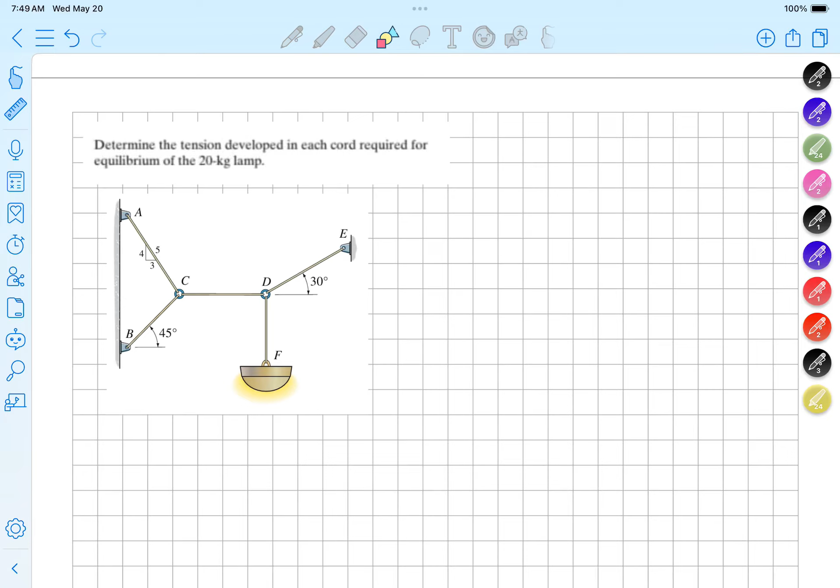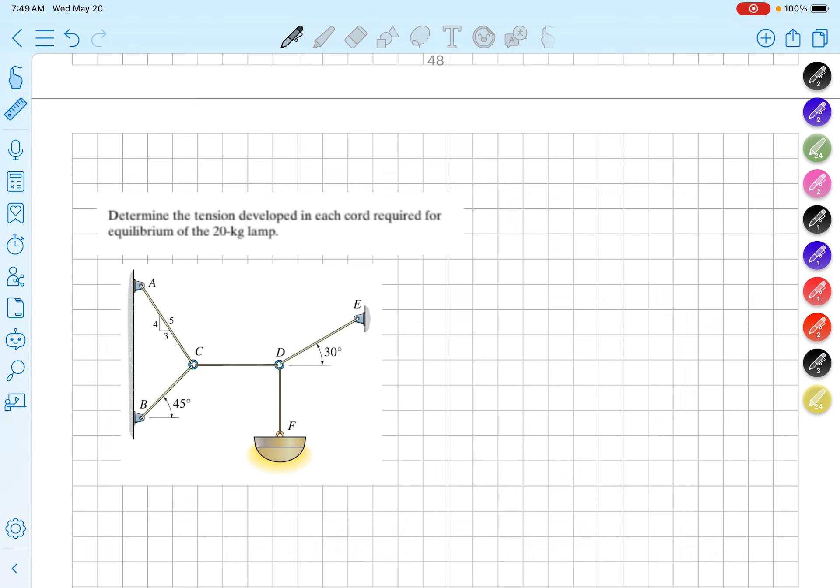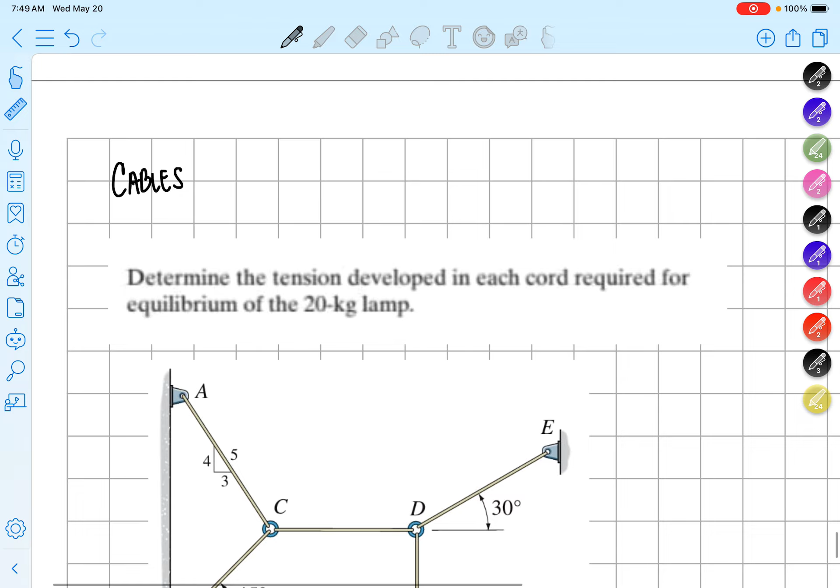So these are just additional example problems, one lang naman, under the cables. Ito yung na-discuss natin, meron ako sinend sa inyo yung video kanina, with parabolic cables, the symmetric and non-symmetric parabolic cables. Ngayon naman guys, yung typical approach lang natin, this is just also the problems related to cables, yung approach na to guys is para lang siyang basta simple equilibrium lang, paano natin siya i-analyze when it comes to solving the problems.

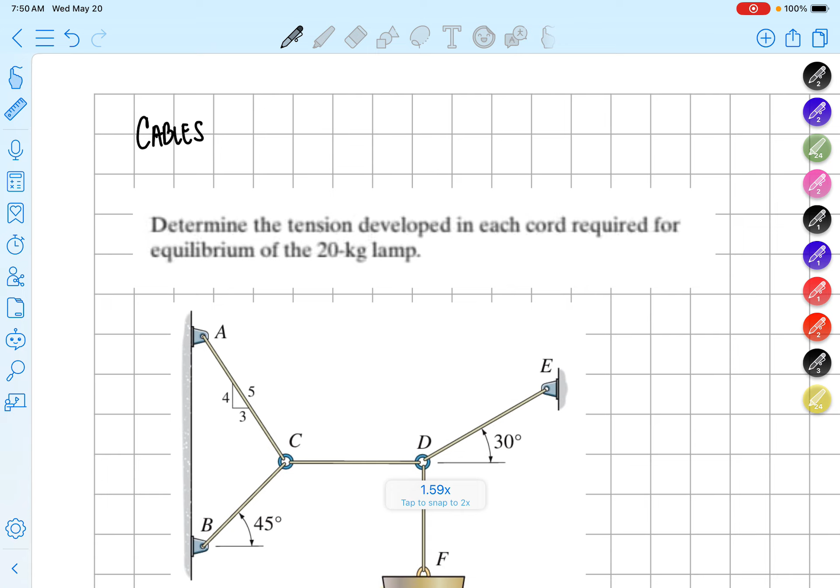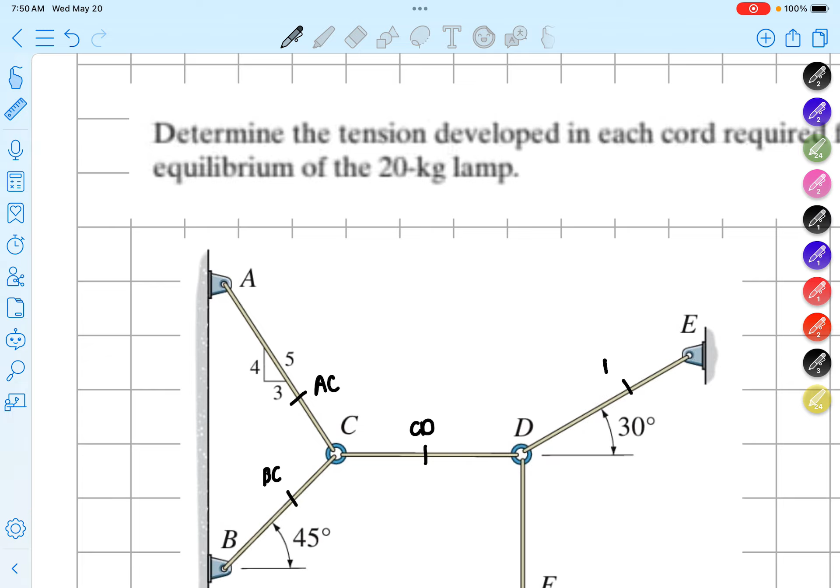Okay, so now, ang tinatanong dyan is determine the tension developed in each cord required for the equilibrium of the 20 kilogram lamp. Okay, lagay natin, this is AC, this is cord BC, this is cord CD, this is cord DE, and of course this is cord DF. Okay, nagkakaintindihan?

So guys, kung papansin niyo, pagka tinake natin itong F na to, by the way, this is 20 kilogram. So in order for us to identify ilang force yung 20 kilogram na weight, i-multiply natin yan ng 9.81 meter per second square na gravitational acceleration. So 20 times 9.81 is simply equal to 196.2. What's the unit? Of course, Newton.

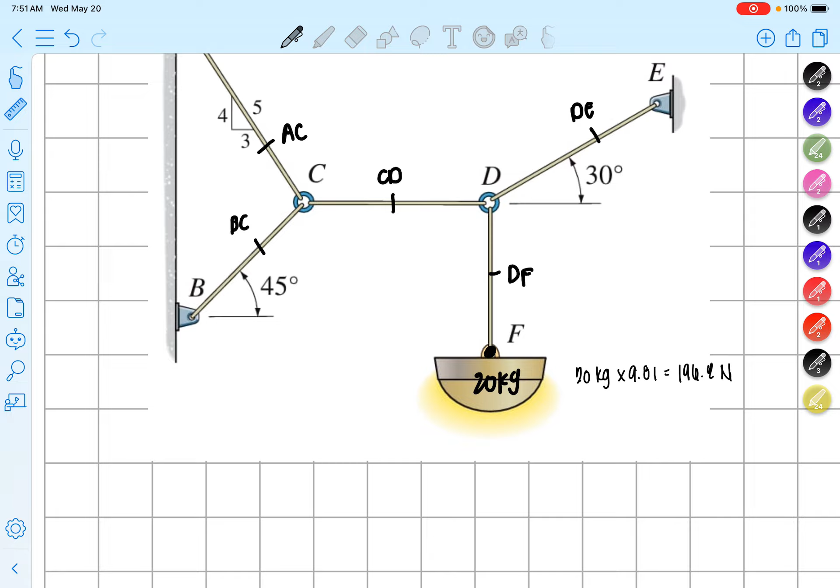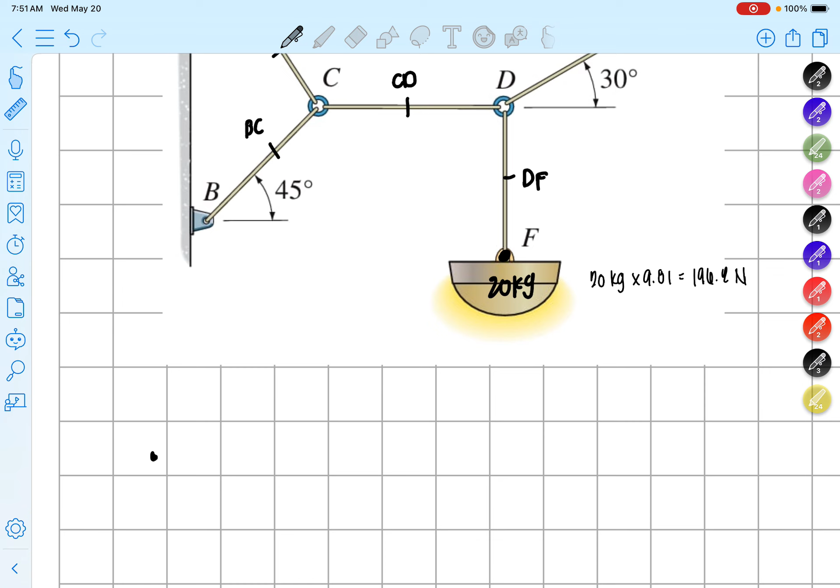Okay, so ngayon titingnan natin. If we're going to isolate the joint F, kasi doon tayo magsisimula, di ba? Parang kumbaga sa method of joints, kung saan tayo solvable. Kung mapansinin nyo sa joint F, or sa point F, lagay natin, baka kasi ma-confuse kayo. Kung lalagyan natin, di ba this is 196.2? Tama, 20 times 9.81 is 196.2 Newton. And then yung force, of course, pag cable, we have tension, di ba? So pataas yung ating DF, okay, for tension.

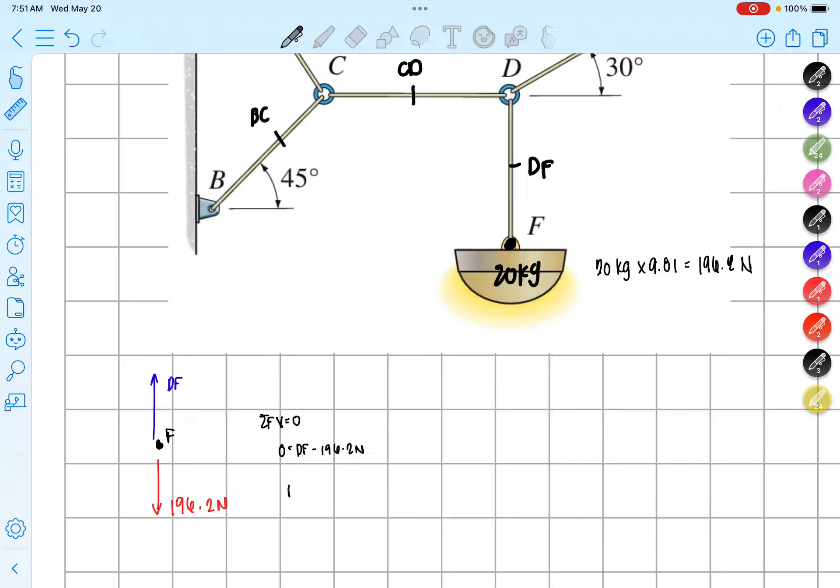So, in this case guys, we have the summation forces vertical lang is equal to 0. 0 is equal to DF minus 196.2 Newton. So in this case guys, we have DF is equal to 196.2 Newton lang din. So, technically guys, ito na yung force natin sa DF. Yan ay patatawirin natin ngayon.

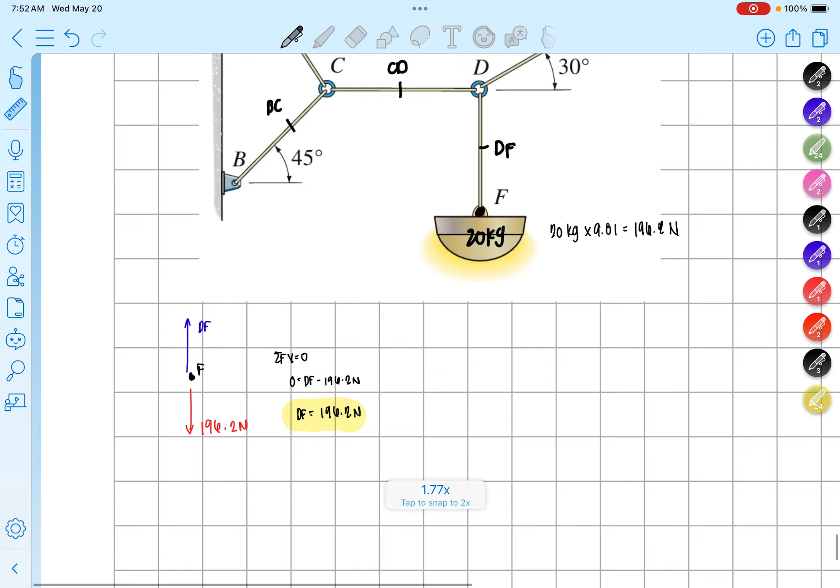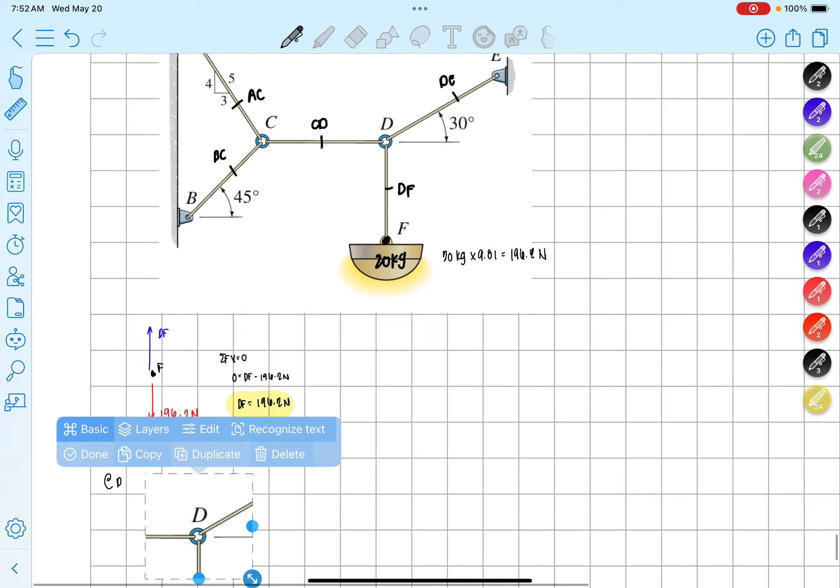Okay, so let's say at point D, i-isolate natin yung point D siguro. Pwede kaya ito? Teka lang. Okay, tingnan natin kung pwede. Yun, pwede pala yun. So ibig sabihin, in-isolate natin yung point D. Diba guys, that this is your DF, this is your DE, tama, and this is your CD. So in this case guys, lahat yan cable, alam natin lahat yan is tension, diba? Wala ka namang compression na cable.

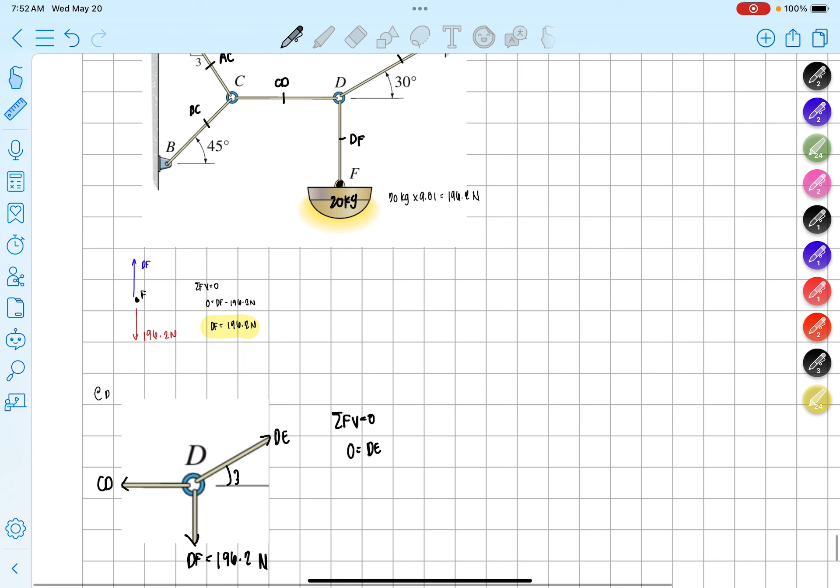Okay, so DF natin is equal, of course, to 196.2 Newton. Paano masasolve yan? Para masolve natin yung cable CD and DE, babalik lang tayo sa summation forces vertical is equal to 0. 0 is equal to DE. Ilan yung angle natin? So this is nakalagay, 30 degrees.

Tama, DE we have sine of 30 minus 196.2. Yung bang CD may vertical component ba? Wala, kasi along the horizontal siya. So DE is simply equal to 0, DE sine of 30 minus 196.2. This is equal to, for DE, we have 392.4 Newton for our DE.

Okay, next, for summation forces horizontal equal to 0. So we have 0 is equal to negative CD, tama, plus DE cosine of 30. Okay, and then yung DE natin guys is we have 392.4. So technically, we have negative CD plus 392.4 cosine of 30. So this is equal to 339.83. So ang CD natin is equal to 339.83 Newton. So this is our answer for CD.

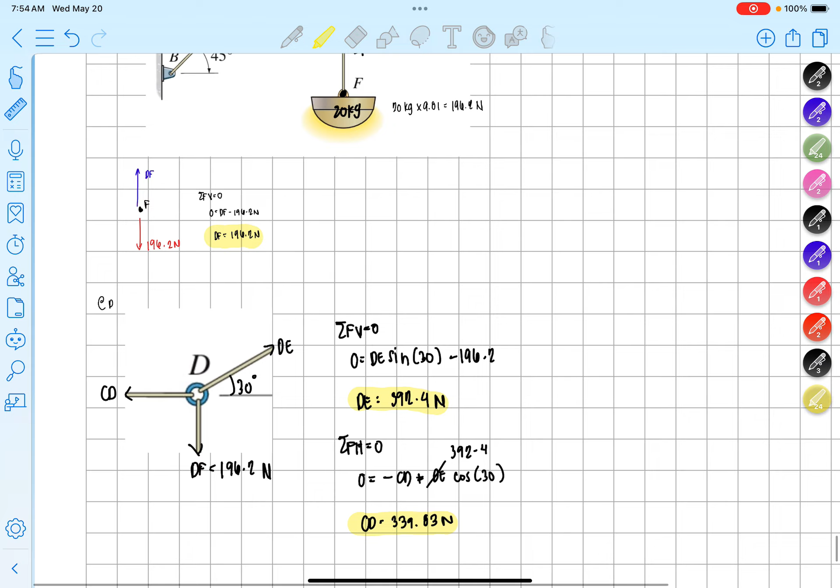Okay, now, after identifying the forces in cable CD and DE, pwede na tayong lumipat ng another point. Ibig sabihin, okay na tayo dito. Highlight lang natin, okay na tayo for DE, DF, and CD. So i-identify na lang natin guys is yung member CA or AC and BC. So i-isolate lang natin.

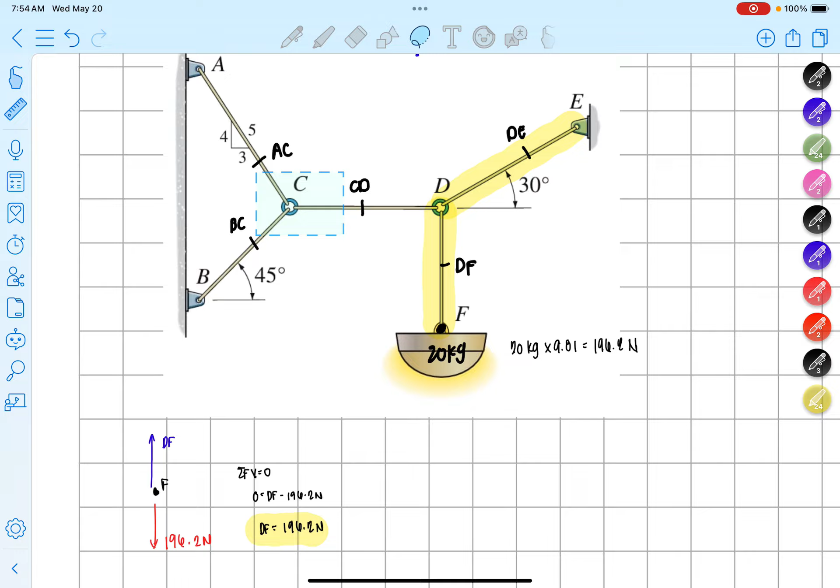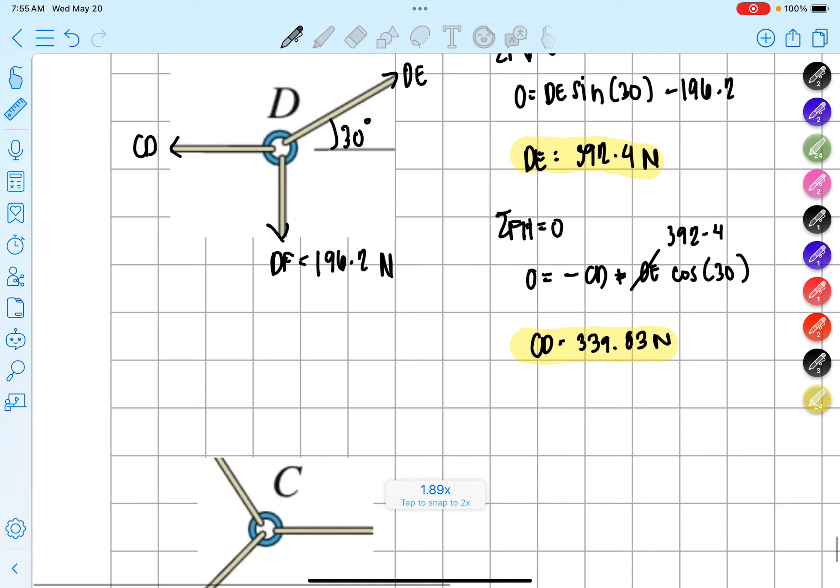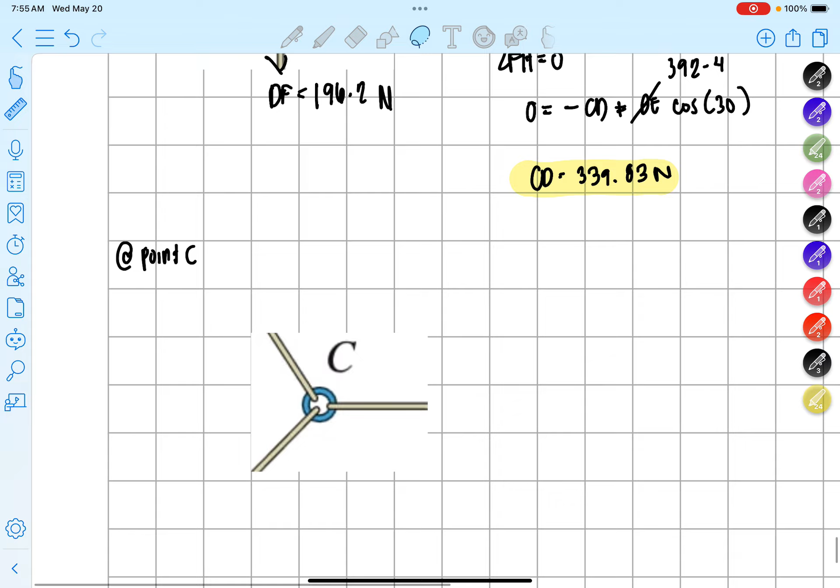Isolate ko lang muna ulit ito. Okay, isolate lang natin siya. Copy ko na lang siguro yan at point C. Okay, let's say at point C. Point C siguro i-adjust ko lang to. Okay, adjust ko lang yan. Okay, adjust ko lang siya.

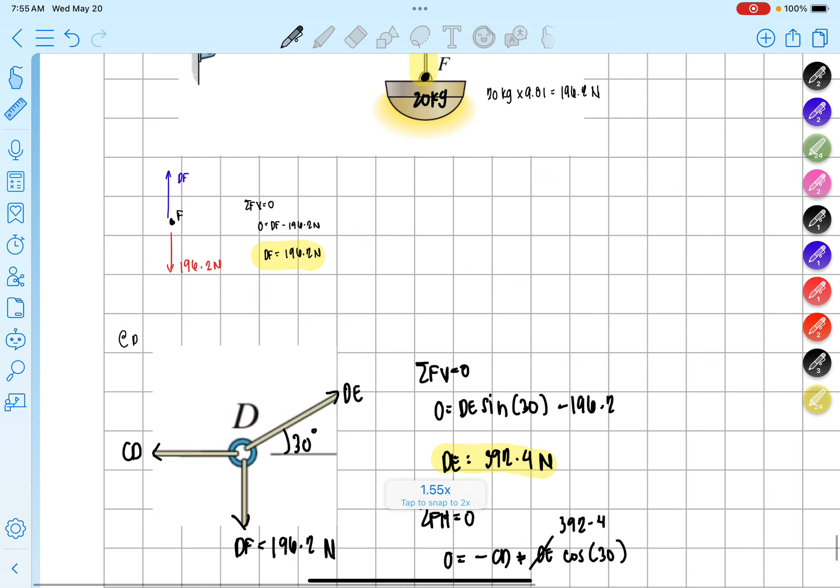And then siguro lahat nga yan is tension lang din. We have tension din dito. Okay, kung titingnan nyo guys, of course tension din yan. Ang angle natin for BC from the horizontal, we have 45 degrees. So we have 45 degrees. And for slope na binigay sa atin for AC ay 3-4-5: 4 vertical, 3 horizontal, and 5 yung the longest side. Okay, so that's 3, 4, 5 triangle. Okay, so that's okay na.

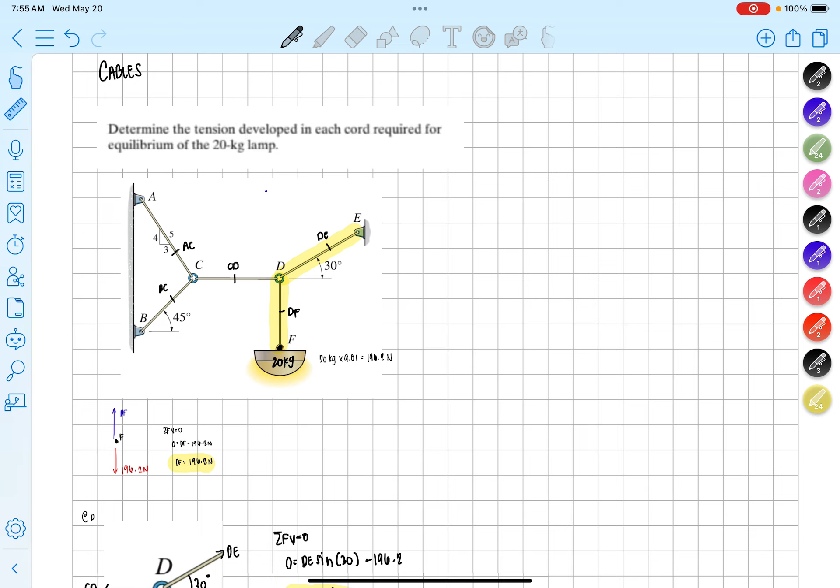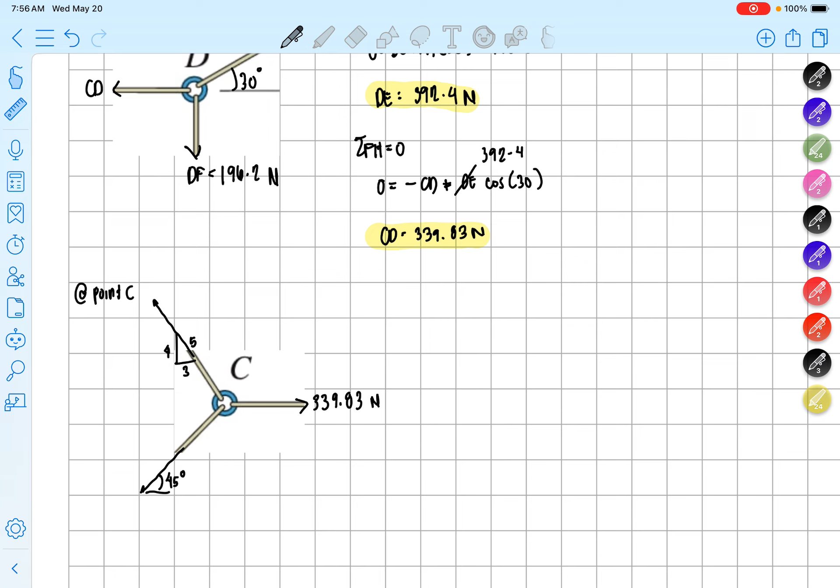Now, okay, at meron tayong CD. Alam natin yung CD, that this is 339.83 Newton. So ibig sabihin, let's take, okay, so parang magkakaroon tayo dito ng 2 equations and 2 unknowns.

Kasi meron tayo ditong we have AC and BC. So we have AC and BC. Okay? So unahin natin, 2 equations.

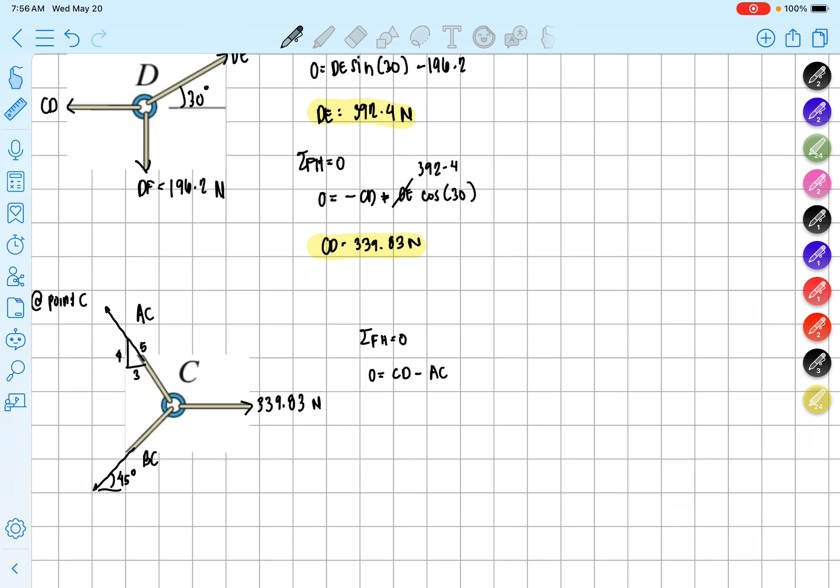Meron naman tayo yan. Summation of forces horizontal is equal to 0. 0 is equal to CD minus AC. Since horizontal tayo, we have 3 over 5, minus BC na sine of 45. Okay, so that's technically our equation number 1.

Okay, ganyan na gawin natin guys. Wala naman ano yan. So we have 339.83. So sige, para mas conservative siguro tayo, para mas maipakita natin, lipat na lang natin. So we have 3 over 5 AC, let's say, wait lang, AC, gawin na nga lang 3 over 5 plus BC sine of 45, minus, equal to 339.83. Okay, so technically this is our equation. Ito yung equation 1. Okay, so i-highlight ko lang siguro yan. Yan yung ating equation 1.

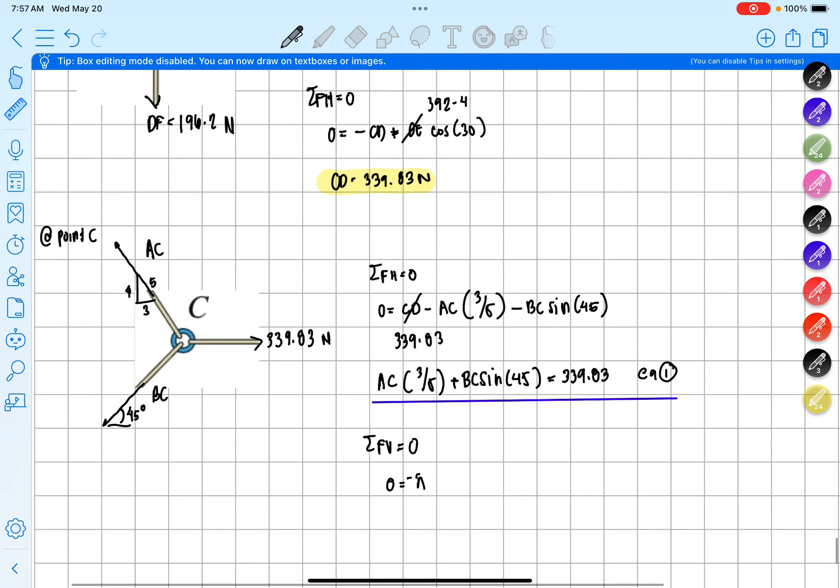Now for our equation 2, madali lang to. This is summation of forces vertical is equal to 0. 0 is equal to AC, and then 4 over 5 tayo dyan kasi vertical, minus BC. Okay, actually this is cosine pala, although 45 degrees naman siya, para lang di malito, this is cosine. Dito pa lang tayo magsasine, sine of 45, although equal lang yan kasi 45 degrees naman. Okay, so yun na, wala na tayong another vertical component besides that.

Okay, so technically we have AC 4 over 5, plus minus BC sine of 45. O sige, iaalaw ko na kayong mag equations unknowns. Ilan yung lilitaw natin dito? 2 equations, 2 unknowns. This is equation 2. Magmo-mode 5 plus 1 na lang tayo dyan kasi 2 equations, 2 unknowns. Mode 5 plus 1 na lang yan. So, mode 5 plus 1.

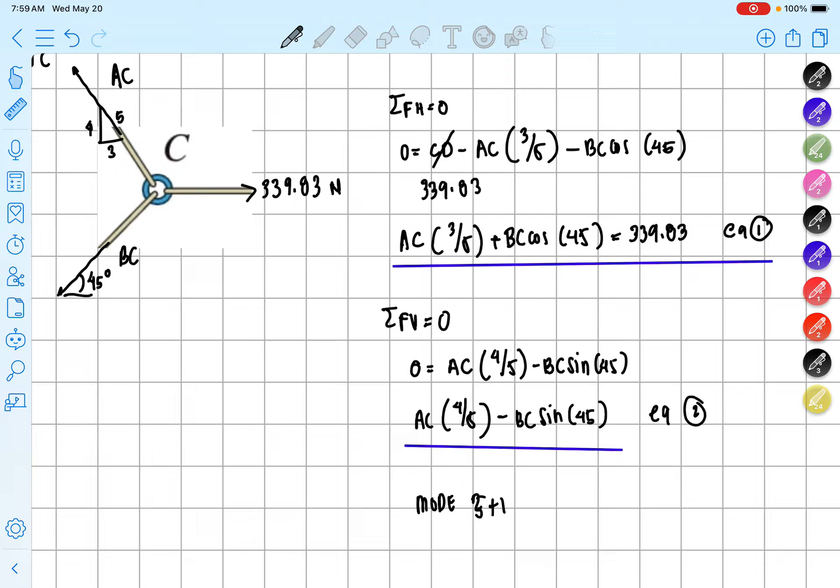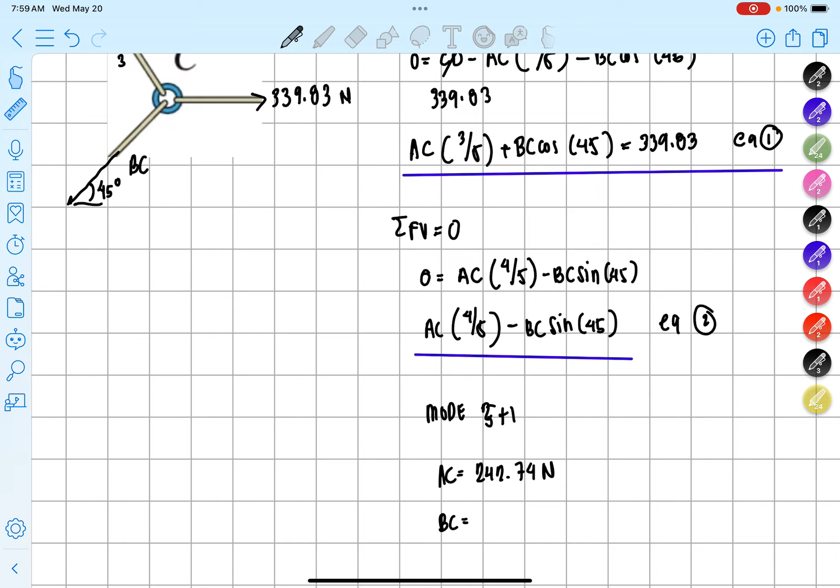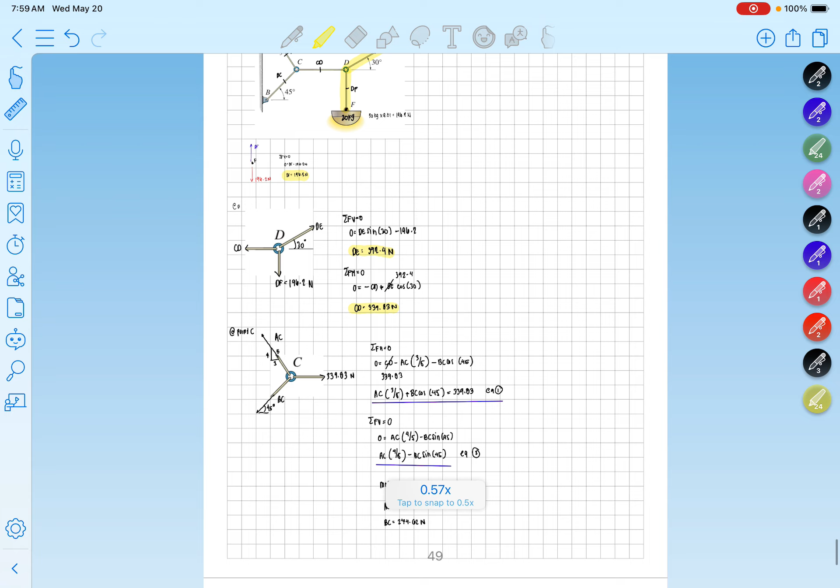So we have 3 over 5, we have cosine of 45, and we have 339.83. Let's say for AC, we have 4 over 5, we have negative sine of 45, and 0. So, ang sagot natin is for AC, this is equal to 242.74 Newton. And then for CB, or BC, BC is equal to 274.62 Newton. So ang mga sagot natin, okay, for each cables, meron na tayong 1, 2, okay na tayo dito, okay na tayo sa AC and BC. So this is, ayun sagot natin.

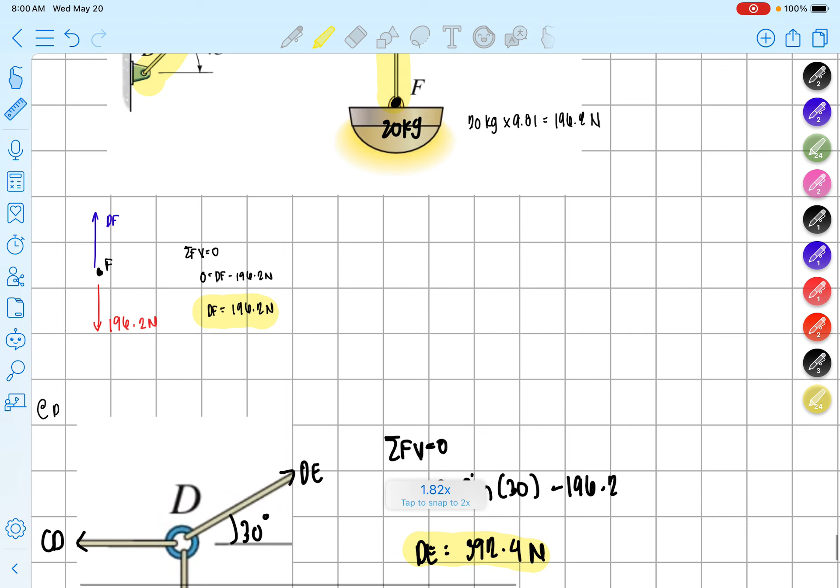Okay, so balik 5 items agad yan kung titingnan nyo, kasi for DE meron ka na agad neto. For DF, meron ka na. For DE, CD, we have AC and BC. Okay, so that's for additional sample problem for cables.